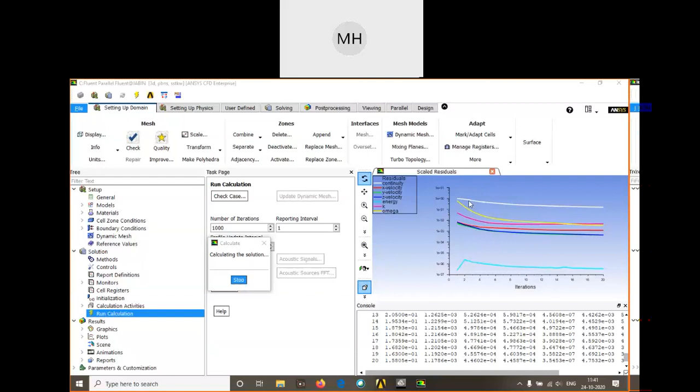Okay, guys. I hope 5 minutes is over, so we can start. Okay. The important thing to monitor while the solution is running. Okay, guys, can we start? Is everyone back? Can we start?

Good. Fine. So there are a lot of things which you are supposed to monitor in the results. One of the important things is, in the bottom you can see so many numbers running: 1.5404 e to the power minus 1, e to the power minus 3, and so on. It is nothing but errors. If the error is less than 10 to the power minus 6, your solution is very good.

But here, so far we have not reached that. Definitely it will take 500 to 700 iterations, but our solution is going good. How I can tell our solution is going good is, there are many metrics that govern a solution. One minute. So see, if the solution is converging something like this, your solution is good.

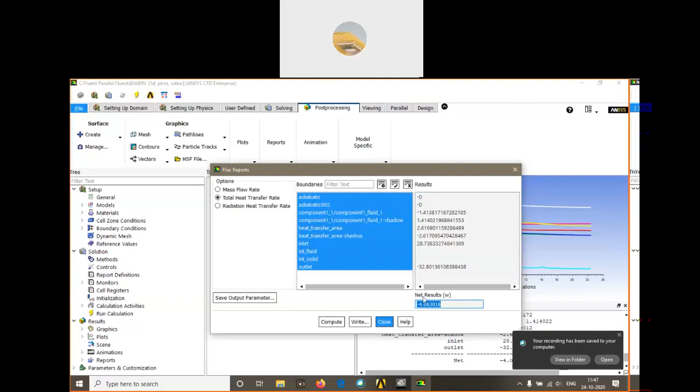Next, go for total heat transfer rate. I'm just computing it. This is also minus 4, but see, this is where our solution is lagging. This is also supposed to be as minimal as possible because energy can neither be created nor destroyed. Based on the conservation of energy principle, this should be minimal. But here we have some value. After some 200 or 300 iterations this will also converge, but minus 4 is a negligible value.

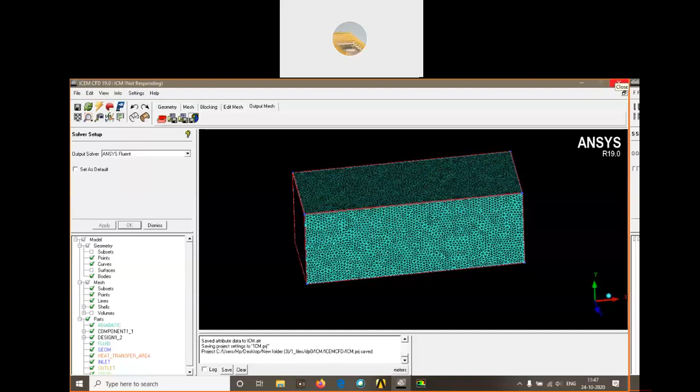So we can proceed with our solution. These convergence levels are very high for just 20 iterations. In 20 iterations we are getting this much convergence. This is very good. Now we are moving to post processing. I close that. It is writing the solution.

Okay, open the workbench, close this, open the workbench. The project is getting saved, so we are supposed to wait. Okay, so it is saved, guys. Fine.

Next, I'm going to solution, go for transfer data to CFD-Post or results, because this is the step by step procedure: first geometry, next meshing, next solving, next result view. Now I'm going to open my results.

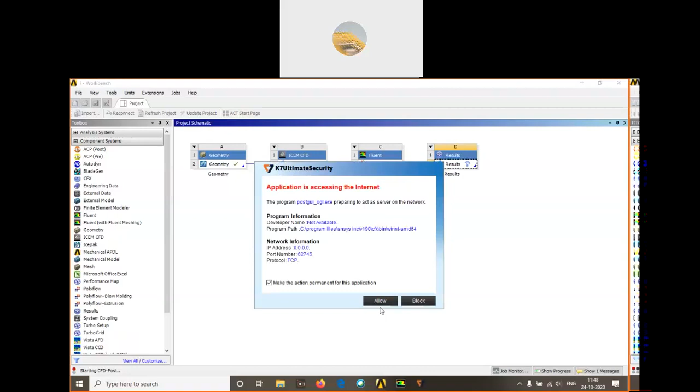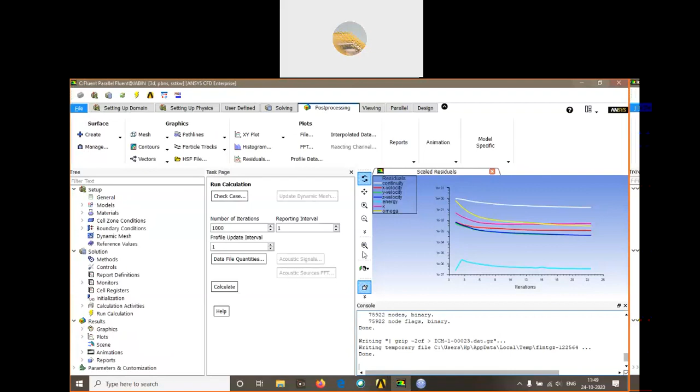So CFD Post is getting started. I'll close this. Okay, fine. So this is what we will see, guys, initially. Now I want to have my inlet. I want to have my heat transfer area. Okay, so these things I need.

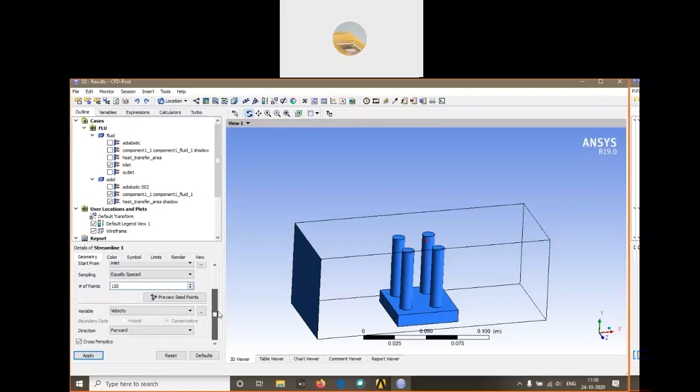Okay, now first I want to check how the fluid flow is happening. So go for streamlines. Start from inlet. I want to have around 150 seed points. Velocity, apply. Okay, so this is the flow lines, guys. So when you see, this is how flow happens.

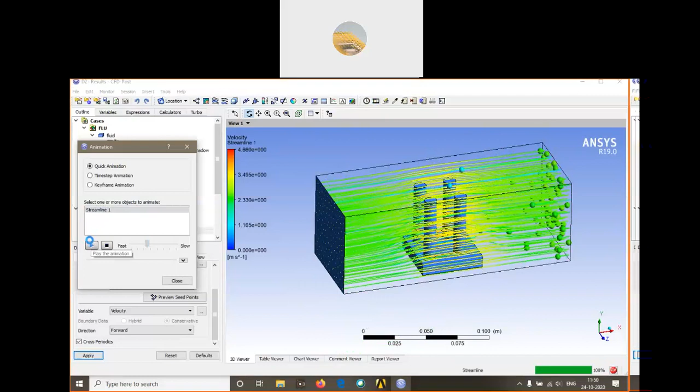Okay, you can even animate it. So go for animate, select the streams, make it flow. So this is how the flow will happen. You can involve so many points. 150 points I have included. You can involve 1000 points to see how the flow is exactly happening. Okay, so I will stop it.

So first, what we check, see, there is flow distraction. You can see, guys. Can anyone tell me what you are observing from here? What will happen? It's not flowing through the solid. Blue area will be. Yeah. Answer is partially correct. Partially, it's good.

See, the flow is coming here. It is getting distracted by the cylinder. So again, it is going like this. What happens is there is no proper fluid flow here. If there is no proper fluid flow here, heat transfer will be very less. So these areas are a major hotspot location. Temperature will be very high here.

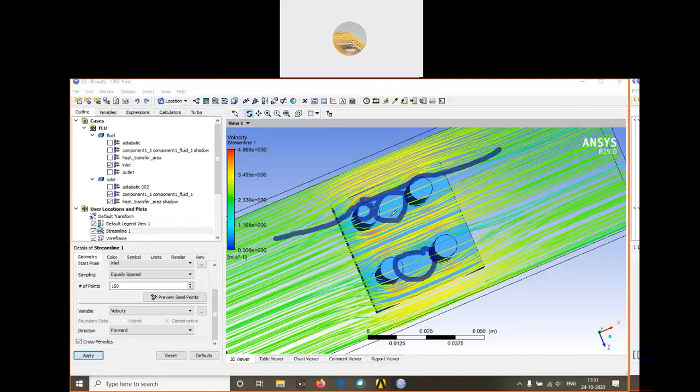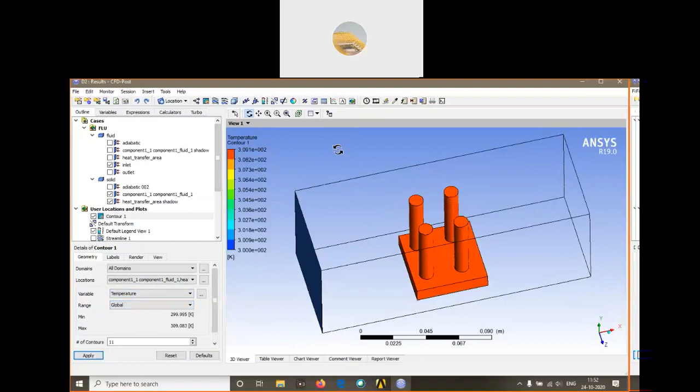Yes, sir. Partial fins will get cooled properly. In between area will not get cooled properly. Okay, so this is the first observance based on the fluid flow parameters. Okay, fine. So next, let us check the temperature distribution. So I'll hide this. Now I'm going to right click, insert contours. I just want to check my temperature, so click OK. Okay, the temperature is fine. It varies from 300 to 309.

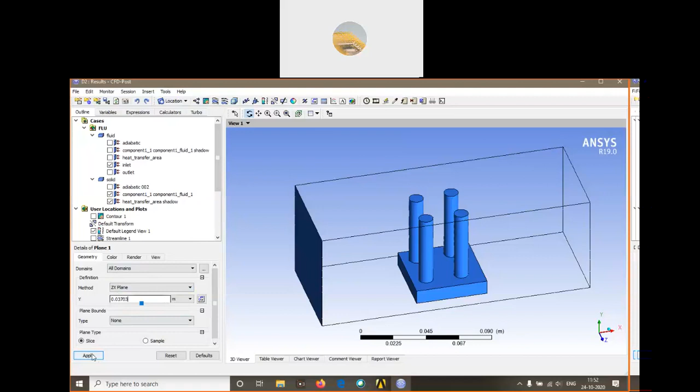Okay, so I'll do one thing. Next, I'm supposed to create a plane. Instead of simply creating a contour, it is better to create a plane so that we can have an exact idea on what we are doing. So I just want to create it based on XZ. Okay, so guys, I have created a plane.

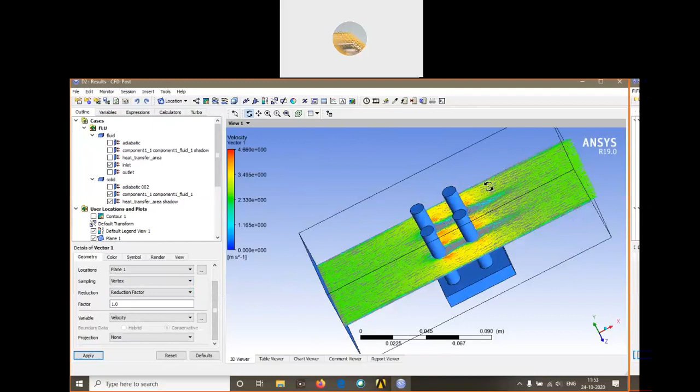Now, next thing, I want to plot velocity vectors. First we have seen a streamline. Now I want to plot velocity vectors, and next we will plot temperature there. Select the plane, give apply. See, this will show you how the velocity is distributed. Again, we can see the same thing. In between, there is no proper fluid flow. Definitely, there will not be proper heat transfer. So I'll hide this too.

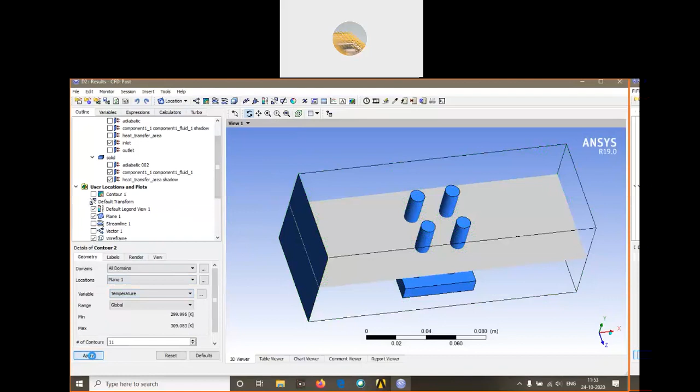Now I will add contour plots. I want to have that in plane. I want to see the temperature, apply. See, guys. So this is showing where the major heat transfer is taking place. So around the cylinder, because of convection, the heat transfer takes place, and you can see how the thing is going.

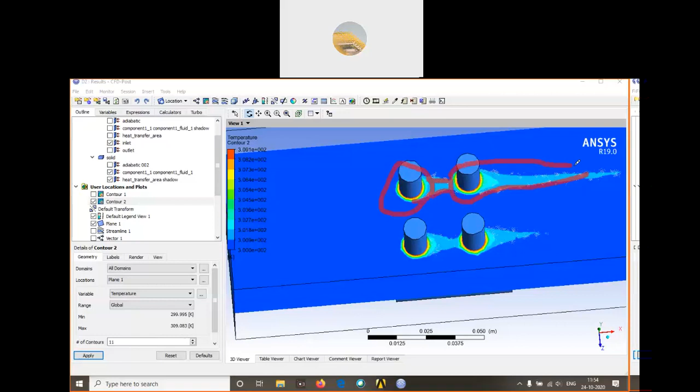I'll annotate it here. It takes heat from here. The temperature is like this. Again, it goes through that. Again, it is taking the heat. So this is how the temperature distribution will be around the surface of the cylinder. Fine. Now, guys, these are just the color plots to tell you how the thing is going on.

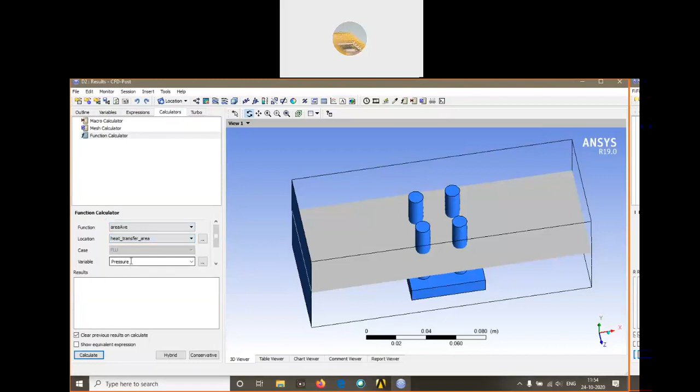But in order to get an exact result, we are supposed to calculate the values. So go for calculate, function calculator. I'm going for area average, heat transfer area. I want to check how much temperature is there in the heat transfer area. The temperature is 308 Kelvin. The fins are at a temperature of 308 Kelvin.

I want to check the total heat rejection or heat transfer coefficient. So go for wall heat flux. See, the surface is rejecting 419 watt per meter square. Guys, this is the value you will calculate in your heat and mass transfer paper by analytical method. You will have a heat exchanger, you will have fins, so many things. By applying formulas, this is the value you will calculate.

Here, the wall heat flux is 419 watt per meter square. Wall heat transfer coefficient is 70. Okay, H, this is the value of H. Now let me check the outlet temperature. Let me check the inlet temperature first.

Inlet temperature is 300 Kelvin. So let me check the outlet temperature. So the outlet temperature is around nearly same. Okay, but this cannot happen. Okay, so in order to have a further refined value, we are supposed to run the iteration by around minimum of 500, so that there will be a temperature pickup in the outlet.

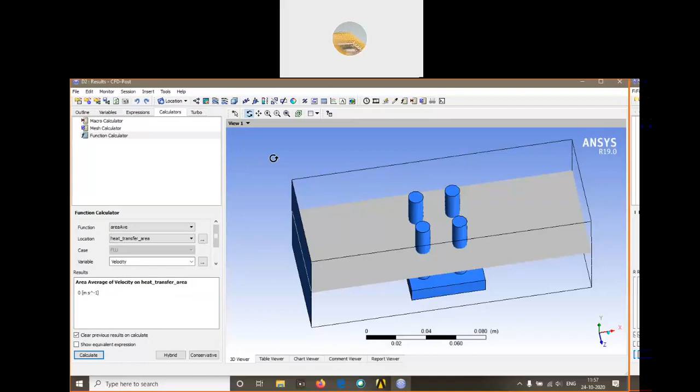So we can calculate everything. So for example, if you want to have a velocity, we can calculate a velocity. But see, I am calculating the velocity for solid, so it is showing 0. Likewise, we can do so many things. Next thing is probing, guys. Okay, we have calculated the temperature, we have calculated the shear, we have calculated the heat transfer coefficient, we have calculated the wall heat flux.

The important thing next is probing. Okay, what is meant by probing? Probing is nothing but I'll create a point. Okay, I'll create a point somewhere. It is 0, 0, 0. What I'll do is I'll create 0, 0, 0.01. Okay, I'll create a probe. Now what I'll do is I'll go for function calculator. In the location I'm supposed to select my point.

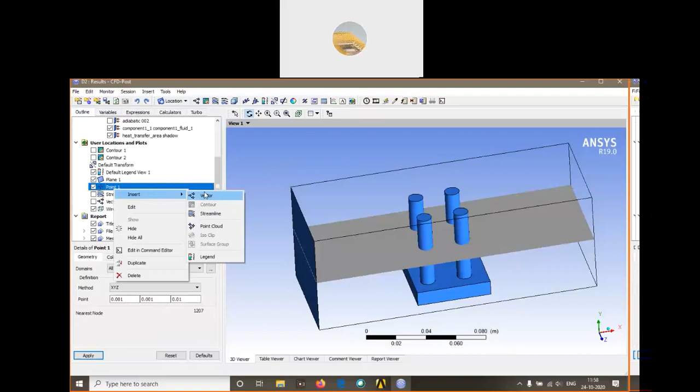Outline. Okay, it is mentioned as a point. Okay, guys. So I just want to calculate my values there. Point. Okay, it is not getting displayed here. That's fine. I'll delete it. Again, I'm just creating it new.

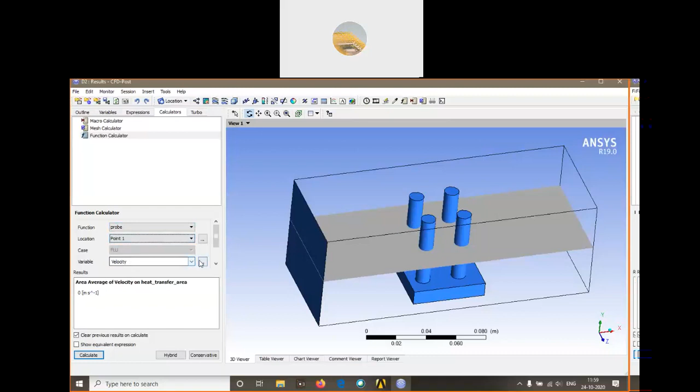Okay, so now guys, see, I have created a probe. Okay, so first we had an area average, so there is no area for a probe. I have selected a probe, automatically point 1 got selected. See, now I want to check my velocity at the point. It is undefined. Oh my god. Okay, see, the point is somewhere here, so that is why it is showing like that. Okay, so I can change the value of the point.

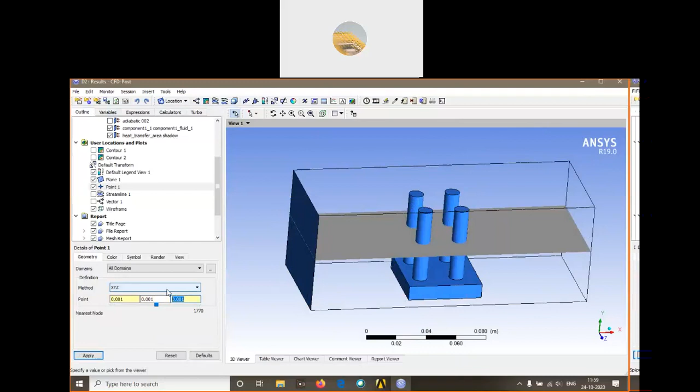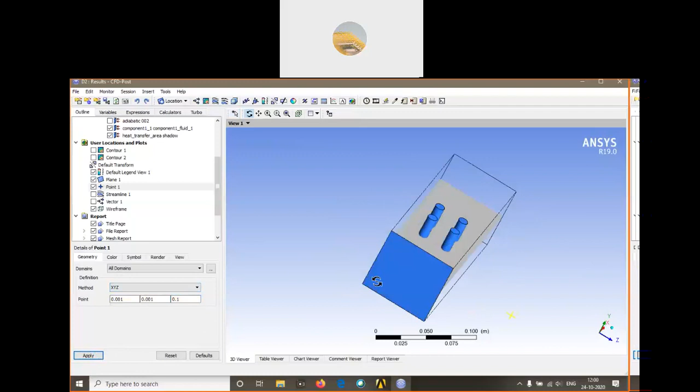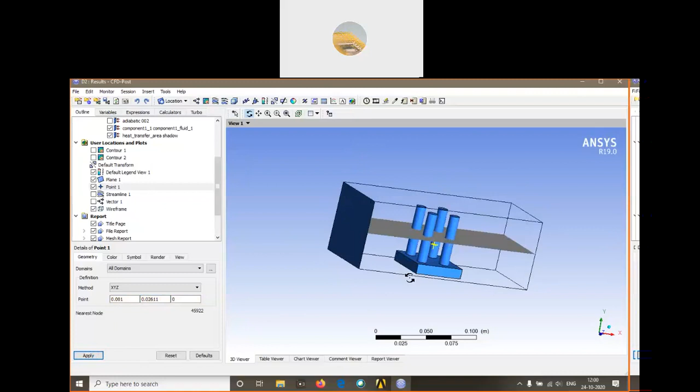Guys, in point probing, we have this problem. Okay, the thing is we cannot exactly place it. It will go somewhere. So this is going out. Okay, I'll put 0. What I'll try to do is I'll try to increase my y. Yeah. So now guys, see, it is exactly in my fluid domain. As you can see, it is exactly in my fluid domain.

Now let me check the value. Okay. So go for calculators, point, velocity, calculate. The velocity at that particular point is 3.5 meter per second. Okay. Because this is not a parametric modeler.

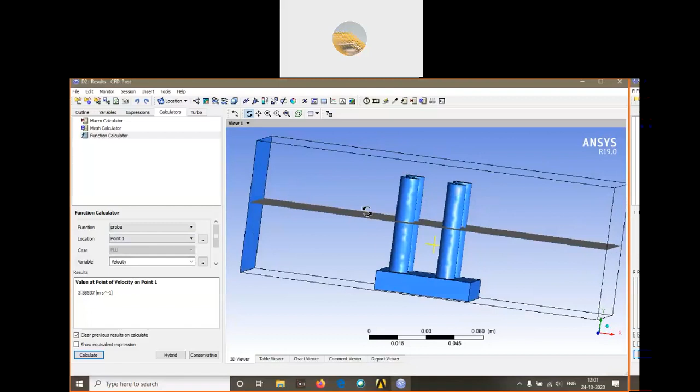Okay. Said Muhammad Mansoor, it's 12. Fine. I'll end my meeting. Okay. I just want to tell you more.

That's all. So guys, see, we have placed a point in the core of the fluid domain. The velocity here is 3.5 meter per second. Okay, you can even check the temperature there. The temperature is 300 Kelvin. Likewise, if you want to check the pressure, it will show the pressure here. It is like -4 because that is located in the middle of the 4 cylinders.

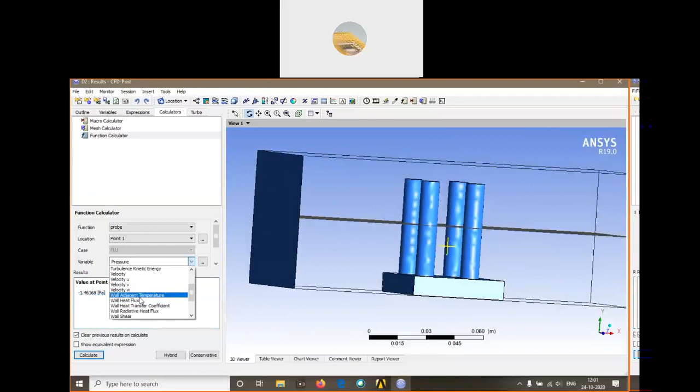Because of some fluid phenomena, the pressure is very less there. Even we can consider that area as a wake region. So density, if you want to calculate, we can calculate the density. It is like 1.225. Okay. So these are the important things which we want to check, guys. Okay. So I want to give a brief overview.

See, we have a geometry where we created a geometry. We exported that to the mesh. We created the mesh with high quality. After that, we exported the values to Fluent where we defined the boundary condition, heat generation. We solved that. After that, we moved on to CFD post processing. Okay. In the CFD post, we saw first streamlines. After that, we saw temperature plots. After that, we saw cut section. It is like velocity vector. Finally, we saw point probing.

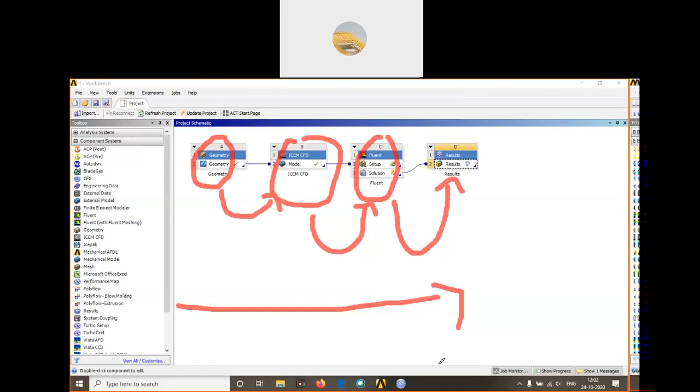Okay. So usually in industry, we prefer point probing. But what we do is we use something called Tecplot. Okay. So there we can easily do all these stuffs. Okay. So guys, this is the CFD workflow. So this is how in industry we perform a CFD simulation. Here the model is very simple. Okay. But we perform simulations in combustors, sometimes data center racks, so many things we deal with. So these are the important steps which are involved in a CFD. Okay, guys, we have seen a complete workflow. If you have any queries, you can ask me now.

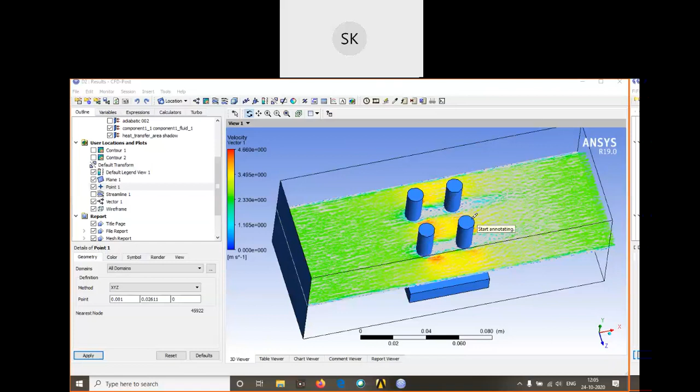Actually, sir, if you take a CPU or any high heat generating components, the fins will not be distributed like this. The fins will be staggered. For example, if the fins are something like this, the second line will be something like this, and the third line will be something like this. They will not be one before the other. If it is one before the other, the same problem we will face. Local hotspots will be there. It will be very problematic.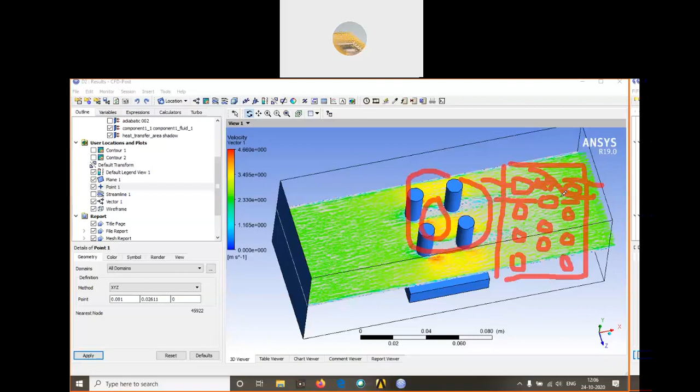But when you use something like this, this distance will be enough so that the fluid will cross it, and the fluid will directly come in touch in this way. By doing these kinds of arrangements, we can avoid this negative pressure area as well. We can prevent localized hotspots. Okay, sir. Thank you very much, sir.

Sir, one simple question for you. Sure. Sir, all over the world, automotive companies are using CFD for 90% of their work. No, sir, we cannot say that it is 90%. Sorry, sir, I'm not getting your question. Sir, automotive companies, 90% are using CFD software only. We cannot say like that, sir.

Because this is related to the subject of NVH, sir, noise, vibration and harshness. Yes, but here we are not dealing with noise, vibration, and harshness. We have so many subdivisions, sir. There are CHT problems, NVH problems, crash problems. For every problem, we have separate analysis. We have separate softwares.

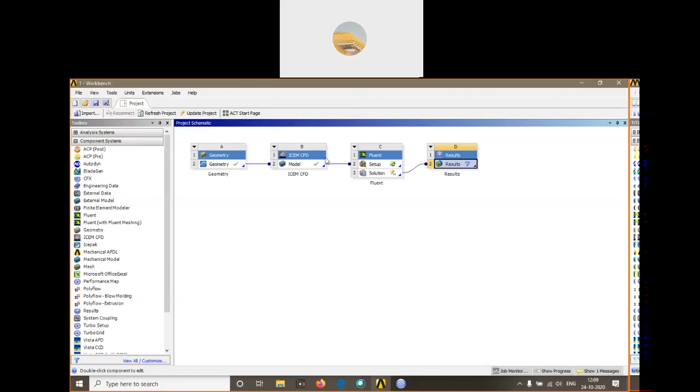So other countries like USA, Japan, India, so many countries, are also using the same CFD. Right now also they are using CFD only. Yes, sir. So this is definitely a very good opportunity for the students, very valuable information you have given to us, sir. We will be in touch with you. If there are any queries from the students, we will let you know, sir. And from the management side, we are in touch with you, sir. Sure, sir. Thank you.

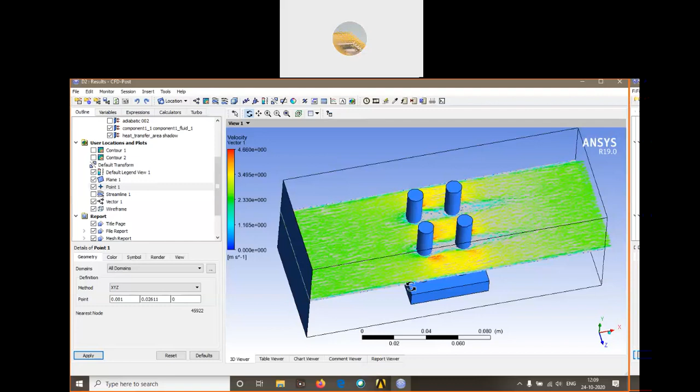For final year projects also, can we send the students, sir? Can you assist them? Definitely, sir. We can help assist. Can you give any particular target for that, the work they have to complete? Basically, if students have their own innovative project, we can give some suggestions and advice. If they don't have any projects, then we can help them perform a research gap study, how to do everything. We can help, sir.

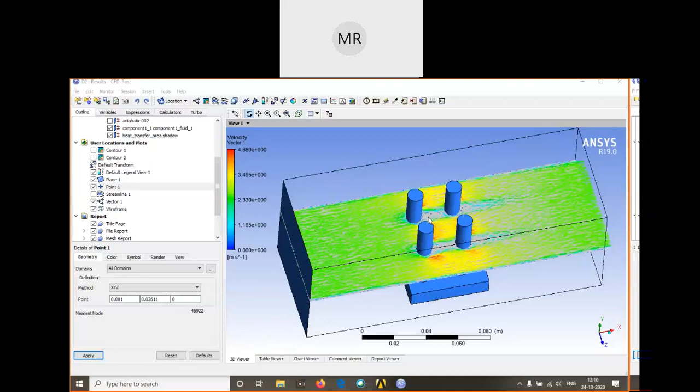Okay, fine, sir. For this final year, definitely 2 to 3 batches I will send you, sir. Sure, sir. Thank you. We will go for some projects based upon this offer. Thank you so much for your valuable time. Hope we will be in contact. Soon we will conduct a seminar and learn more about this subject.

Sir, this is our assistant HOD, Mr. A. Rabbani. Oh, okay, sir. Fine. I got it, sir. Thank you, Rabbani sir. I'm happy to help students with their projects, sir. Definitely. Thank you, sir.